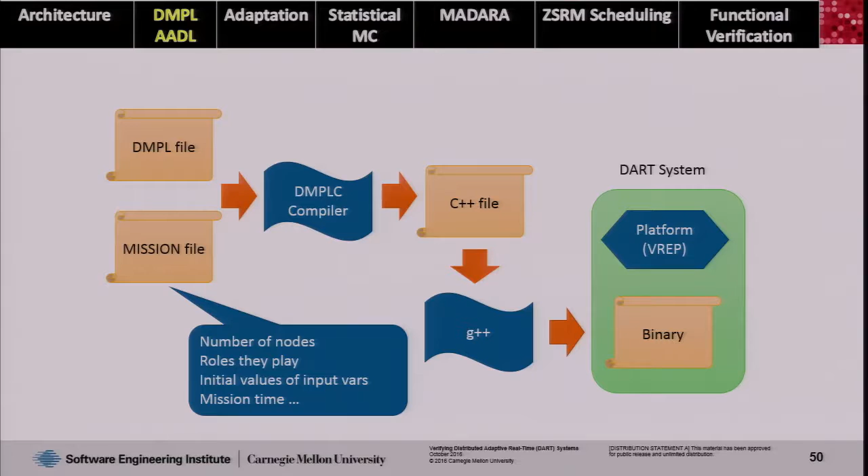So that's one part of the language. This is the tool chain. So this is one snapshot of our tool chain that takes you from a DMPL program and something we call the mission file. The mission file defines the other parameters of the system. How many nodes are there going to be? How many protectors? How many leaders? What's the time limit on the mission? What are the various probabilistic assumptions that you make? Like if you have inputs from sensors and these are random, what are their distributions, etc.

And given all that information, we can actually have a tool chain that takes you from that input down to either a binary or some kind of verification that you can do in the backend. Right? Of course, we need to deploy this on a platform to actually see what's going to happen, even if we want to just run a simulation. And so the platform we've been using so far mainly is a simulator called V-REP. It's a publicly available simulator that's turned out to be very useful for our project.

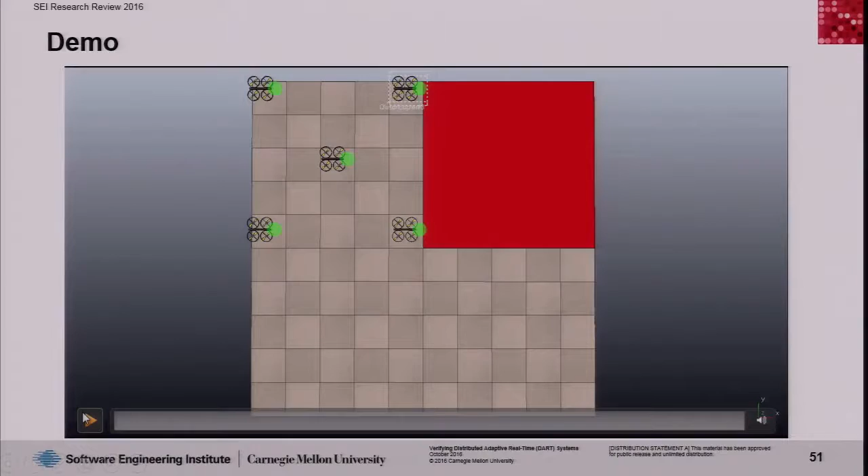But we are actually moving more and more toward physical platforms where we can run the code and see what's happening. So here's a quick video of what would happen for that system. So this shows one run of the system. This is code that has been generated from DMPL and has been then run on the V-REP simulator.

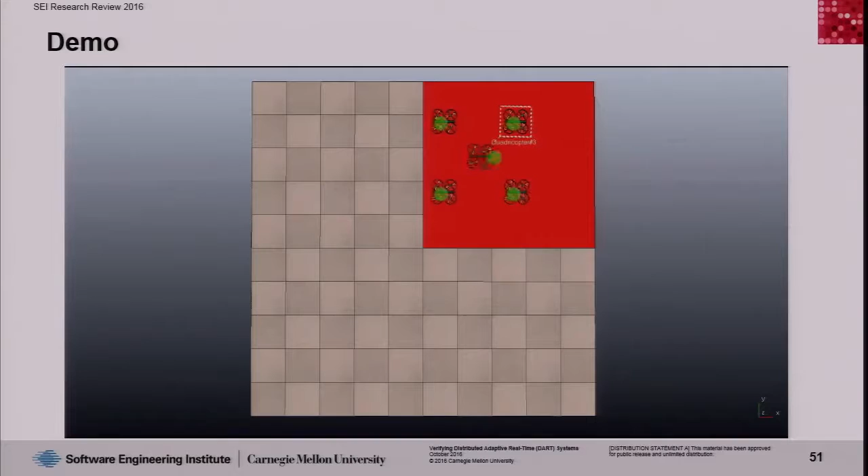And so you can see essentially the formation change that you were expecting. So as the system moved into a high hazard area, it went to a tight formation. And then as it's exiting the high hazard area, it goes back to the loose formation.

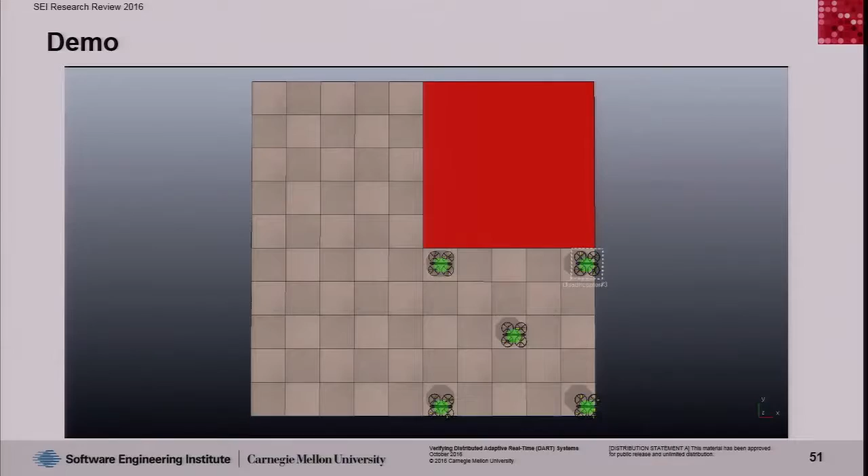And I want to remind you again that the system is probabilistic. So if you ran the simulation again, you would see slightly different behavior because the underlying hazard levels, etc., are randomized every time. But that's why we have techniques like statistical model checking and Monte Carlo simulations to evaluate probabilities of success. But this is one run of the system that was generated.

We have an alternate tool chain. So the previous tool chain that I showed you is purely command line. It's very easy for us to work with. We've been working on an AADL OSATE based tool chain that basically encapsulates everything that I've showed as an AADL annex.

So Julian gave a very nice presentation about how AADL has this annex mechanism. You can take any language and put it inside AADL as a sub-language, and that's exactly what we did. We took DMPL and made it a sub-language. So now you can stay entirely within the AADL ecosystem, and you can drive everything from OSATE.

So I do not have time, but please come by. I'll be happy to show you a demonstration of how this works from AADL. But the point is that we are moving more and more toward this kind of AADL OSATE infrastructure so that we can plug into other projects and we can use the host of analysis that is available with AADL.

So we actually used a sequence of scenarios through the project to drive our research, and this was important for us to be on track with respect to operational validity and DoD relevance. So we had a team member who had worked with DoD organizations and had the right kind of insights to help us say, here is a sequence of scenarios that would make the outcomes of this project more DoD relevant. And he helped us create these

And so I want to show you one of the last scenarios, again a video. So this has essentially a group of nodes that have two kinds of obstacles. You have the green obstacles that are friendly and the red obstacles that are dangerous. And what the nodes are able to do is essentially not only avoid colliding with each other, but also detect those obstacles, and based on what level of threat is perceived, take different actions.

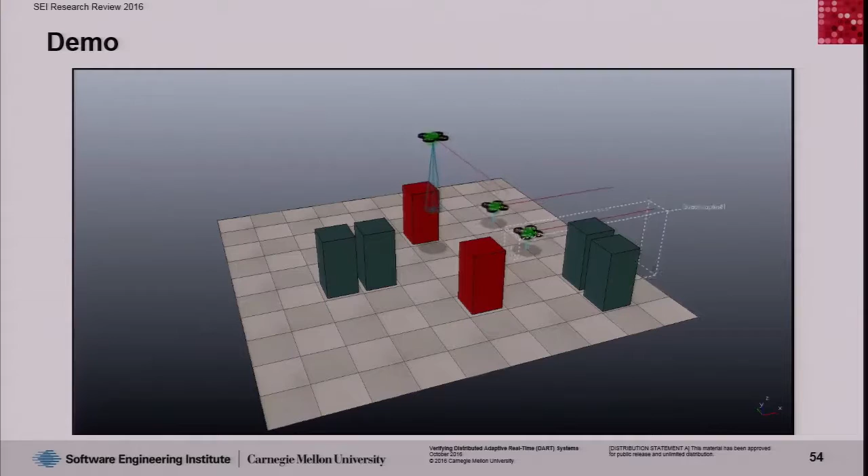So you see that when the node gets to a red obstacle, it actually moves much higher up because that's what it's programmed to do. It's programmed to be as far away from these hostile obstacles as possible. So that's another scenario that we did. And again, this is one video, but in practice, what we do is we program this and we run it and we see what happens.

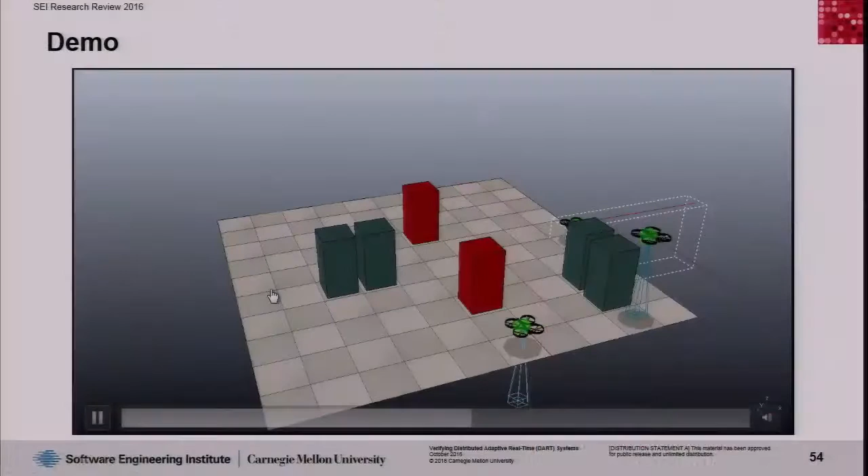Okay, so now I'm going to, in the next 4 or 5 minutes, quickly go through the technical areas that we worked on. And I'm going to use the banner on top to indicate which area we are talking about. So if you are not sure, just look on top, and the area that's highlighted is the area that we are talking about here.

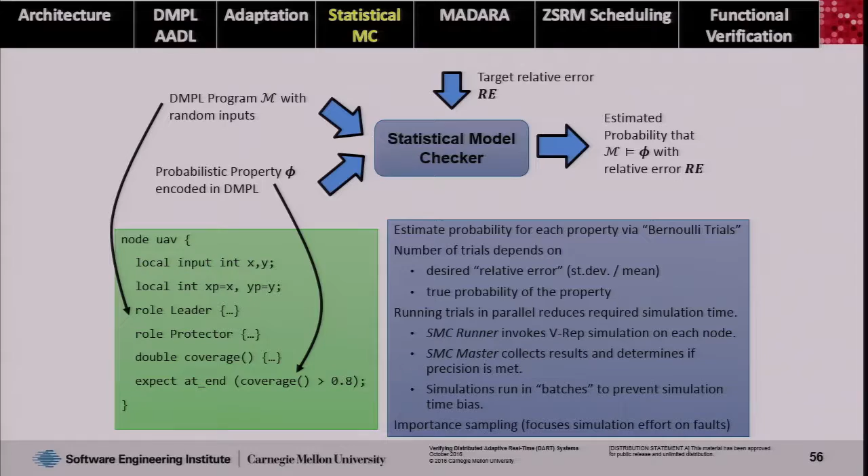So now we are switching to statistical model checking. So this is: you're given a random system and you're given some predicate, something that either holds or not at the end of a particular run of the system. And the system is probabilistic, so on some runs it will hold and some runs it will fail. What you're interested in is to compute the probability of it holding. So map it to your favorite mission.

And statistical model checking is a technology that actually was invented in CMU, but we were given funding by Dr. Beno a couple of years ago to start looking into it. And since then, what we've done is basically taken this into a more mature area where you can apply it on bigger and more complex systems like Dart systems.

So we actually encode the property that we're interested in inside DMPL in a very formal way. So at the bottom, you see an expect statement. That's essentially the property. And then we use a bunch of simulations, Monte Carlo simulations, to get to an estimate of the probability with a desired precision, which is exposed in something called a relative error, or RE. So we want to know what the probability of the mission success is within 0.001, for example.

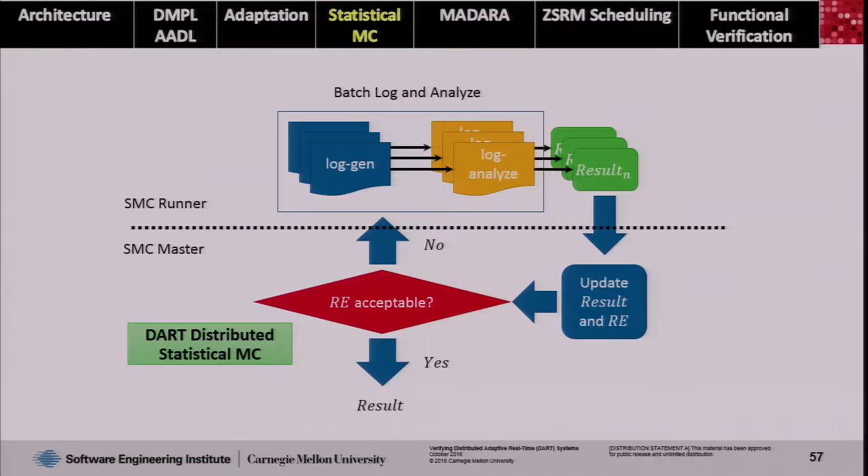And so technically what happens is you have a master that's coordinating all the Monte Carlo simulations, and the master basically runs a whole bunch, and it can actually do this in parallel. So if you have a lot of supercomputers or high performance computing infrastructure, you can run lots of simulations in parallel, and then it collects the results, computes the probabilities, computes the precision that you have, and if you have reached the desired level of precision, you just stop, and if not, you keep going and you do more simulations. So that's at a high level what happens.

And in practice, what we have implemented is a tool called Demeter that actually does all these simulations by isolating them in Docker containers. So there's a fair amount of engineering that has happened to make this work for complex systems. And this is online. It's within the SEI. It's backed up by, I think, 10 blade servers that can run hundreds of simulations in parallel. To date, I think we've run over 3-4 million simulations, and the best thing is it's very robust.

We found that we can literally start the experiment and go to sleep, and when we get up in the morning, we see the results. So that's very good from our point of view. And we have a couple of papers at RV last year and again this year that describe the details of this project. What were we able to do?

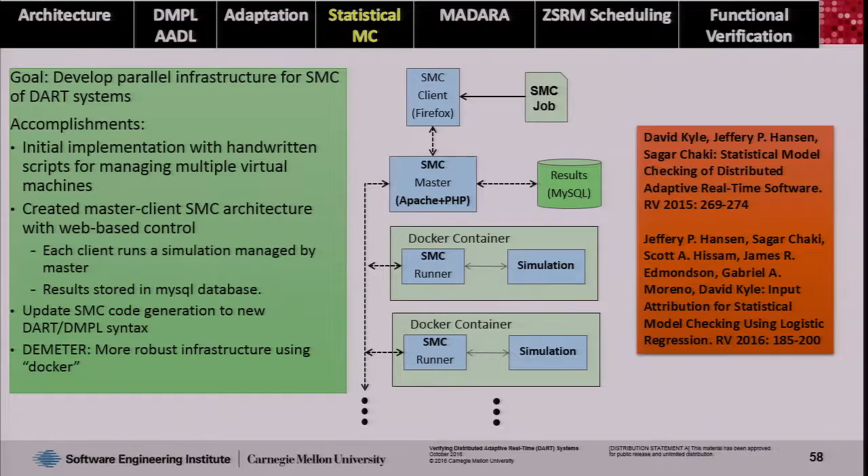The one quick part about this actually is something called input attribution. So, in statistical model checking, traditionally all you get is probability. What you don't get is why the probability is what it is. And that's really important because that's like the counterexample. So if your probability came to be too high or too low, what you would like to know is, how can I improve the system so that the probability goes down or up as I desire? And for that, you need kind of a cause-effect analysis.

And so what we have done is implemented a technique based on machine learning, logistic regression, that can actually take the results of all the simulations and learn from that the most probable causes that contribute to the probability being high or low. And that's been very successful. The second, the RV16 paper, talks in detail about what we call input attribution.

This is one area where we are actually trying to apply this technique outside the SEI. So we partnered up with NREC, the National Robotics Engineering Center. And what we are trying to do is use statistical model checking to evaluate the quality of a planner that they have. So they have a system where they can give a robot a high-level command, like go to the front of that building or go to the left side of this building.

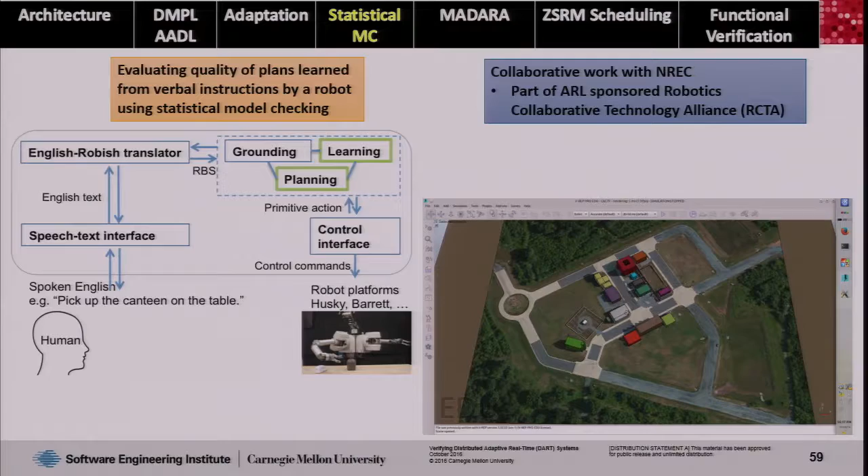And the robot then takes that and does a sequence of steps starting from speech recognition to planning, and then all the way down to low-level path planning and actuation, and actually tries to follow that path. And what they see in practice is, out of 10 times it runs, it fails 2 times and doesn't perform so well the next 5 times, etc.

So the whole thing is kind of ad hoc, subjective, and it's based on a human expert. And it's also very hard to do it. Like, if you're working with real robots, running 10 experiments often takes quite a bit of time. So when they saw our statistical model checking work, they said, hey, can we use simulations like you do to actually evaluate the quality of the planner? And that's what we've been trying to do.

And we've had some encouraging preliminary results, but I think we need to push this a little further to see how far we can go with statistical model checking in this. But I think most of it is just sort of engineering issues and figuring out how to put a right robot model inside a simulation, etc.

Okay. So real quickly on scheduling. So this is work that we've been doing. So we build on a prior work on something called zero slack rate monotonic scheduling. And this is about, like I said, threads in DART have both criticality and priority, and they may not be compatible. So you could have high criticality threads that have low priority, etc. And we need to manage these two when the resources are limited. And that's what ZSRM does.

It provides a guarantee that in overload conditions, high criticality threads are always going to get preferential treatment. In normal operating conditions, it's going to be basic rate monotonic scheduling. And what we've done on top of this is something called ZSRM DAG scheduling, which is think of how to schedule systems where a logical task may not be happening on one node, but maybe actually spread over multiple nodes of the system, and how do we do scheduling for these kinds of scenarios.